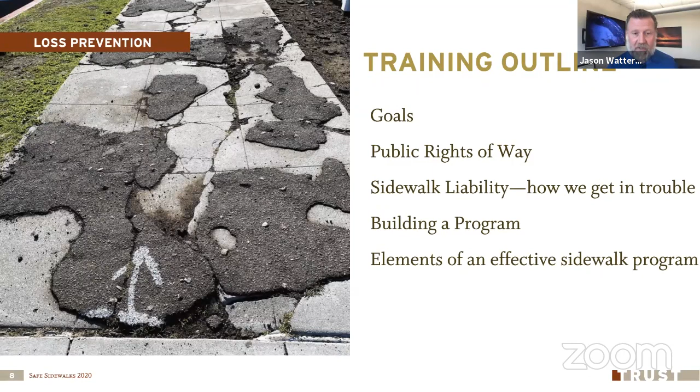Today's presentation is on safe sidewalks, and I'll be presenting on that subject. Sidewalks are one of those necessary evils. They're a great thing in our communities, but they can cause us a lot of problems. So today, this is the outline of what we're going to talk about. We'll talk about what's really our goal as it pertains to sidewalks. Talk about public right-of-ways, the liability that we face, how we get ourselves into trouble sometimes, and how to build a program that can be effective in managing this major part of our public infrastructure and be able to avoid those big losses and have people get injured in our communities. So that's what we'll talk about.

First of all, what's our goal? What are the things that we're trying to accomplish when it comes to sidewalks? Well, one, we want safe pedestrian movement through our communities. Okay, that seems like a pretty reasonable thing, and that's probably why many of your communities have decided to put sidewalks in place, or if you just have a building, you put those sidewalks around there so people aren't stepping in mud puddles or trying to find a way into your building. We're providing them a safe path of travel.

Another of our major goals is to prevent accidents. We don't want people to get hurt, and we really don't want to get sued. We really don't want to have to pay out for injuries or other damages that happen because of our infrastructure. And so those are really our goals. We want to have safe travel through our communities and not have people get hurt. And we really don't want to pay out money because people got hurt.

So one of the concepts that we start out talking about are public rights of way. A public right of way is really an easement to allow travel for the general public. In most cases, the property that sidewalk sits on is probably owned by the homeowner or the person owning that property there. But we as an organization have secured an easement to travel along there, and we put the sidewalk there. So basically they're owning the property, but we have this route of travel that's going over that. The right of way is generally thought of as being from sidewalk to sidewalk in improved communities. Maybe a little bit different out in the county unincorporated areas, but when we think of a traditional city, sidewalk to sidewalk.

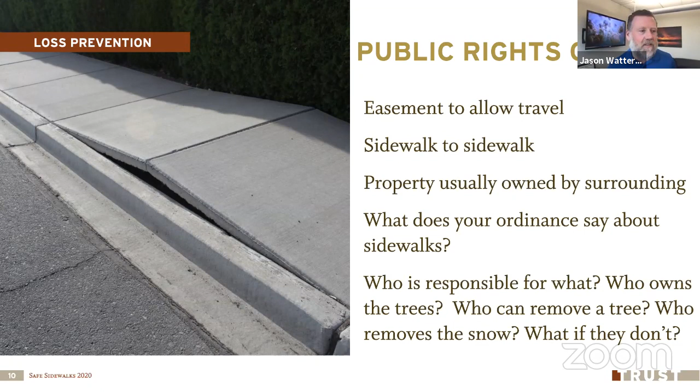Okay, so let's talk about sidewalk liability. First, there's kind of this concept of, if I don't install sidewalks, I don't have any sidewalk liability. And that's kind of true.

It's kind of correct. If I don't have sidewalks, it's pretty difficult for somebody to sue my organization based on tripping and falling, because the public improvement was never put there. But in many cases, we've decided that this is one of the amenities or one of the public improvements that is really valuable to our community. We want to have safe sidewalks so people can travel from house to house and throughout our community, and trails go along with this as well.

We've made the decision that we're going to put this public infrastructure in. As soon as I pour a slab of concrete, I own some liability for that. So if I have a sidewalk, I own it, and I own the liability that may go along with there. And I know there's some ins and outs of whether you're responsible for these things, and that's what we'll talk about next. But we really need to get used to that concept that, hey, if I build a building, if I lay down a sidewalk, I own some measure of liability as it pertains to that public improvement.

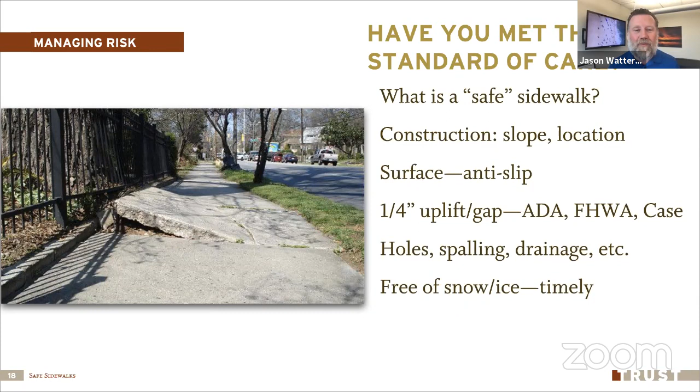Couple of cases, and once again, I'll just let everybody know, and you probably figured this out a long time ago, that I am not an attorney, and so when I talk about case law, I'm not giving legal advice here, but there were two cases here, and there are others, but two really important cases.

One was in 1973. It was West versus Provo City, and it basically said the city's not liable for snow and ice unless they did something that was negligent, like we left it too long, or we designed it in a certain way. But just because it snows, just because there's ice there, the city was not necessarily liable for just the presence of a slippery surface. Okay, so that was a good one for most of us in local governments.

And then in 2013, we had Kerr versus the city of Salt Lake. This was really kind of an earth-shattering case because it kind of undid a lot of things that we'd had in the past. What happened was there was a section of sidewalk in front of a business that had some uplift. I believe it was a new business had gone in there. They contacted the city. It was damaged surface.

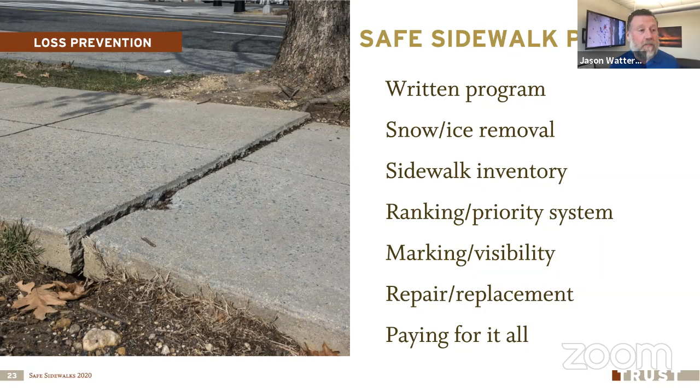So here are some elements of a safe sidewalk program. One, have a written program, a snow and ice removal program, how we handle that, an inventory of our sidewalks, ranking the problems and the condition of our walking surfaces, making hazards visible, and the procedure of repair and replacement, and who pays for it all. These are all important parts of that. So once again, have a written program, write it down. You don't need to reinvent the wheel on this. There are tons of great programs out there.

Juan is on here. I was going to pat him on the back a little bit for Springville City, but he's not there anymore. Springville has a great program, and it's available online, so you can look it up. And it really outlines that. And I'm not just picking out Springville. There are tons of you out there that have good programs. Go in, call the other cities and say, how are you doing this?

And put your program together. Share those things. Let's get better together. This program needs to pair with your local ordinance. Who owns the trees? Who's responsible for repair and maintenance of the sidewalk? We need to follow that. It should also be part of our accessibility plan as we look at planning for those with disabilities. When we talk ADA corners and accessibility, those types of plans, all of this should dovetail together, so we have a comprehensive plan.

What are appropriate modes of travel? I just threw this one in because this is a current challenge that some of the larger cities are seeing, and it may extend to the smaller cities where we have these rental scooters. What are appropriate modes of travel? I probably won't go out on a limb on this one, but it does concern me when we have people going at a fairly high rate of speed on these scooters, intermixed with pedestrian traffic. It also makes me concerned: what if we put those scooters out in the traffic lane? That's a concern to me as well. But it's something I think we all have to look at and face what the realities are as modes of travel change.

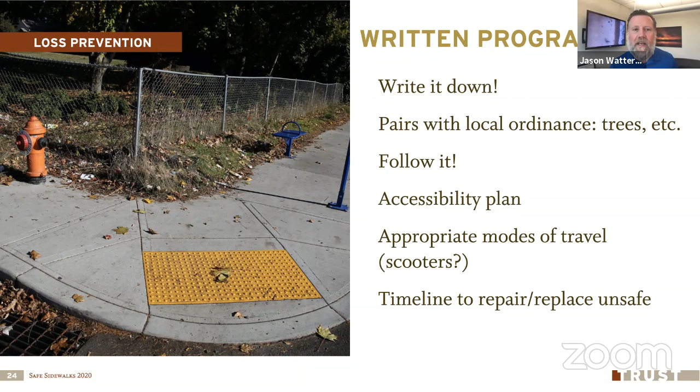All right, snow and ice removal. Who's responsible for removing snow and ice? What if they don't do it? What does our ordinance say? Can we charge this person, or can we fine the person? I'd prefer not to do fines. I'd prefer just, hey, if it's not done, we're going to go out and clean it up, and we're going to send them a bill for it if that's what your ordinance says. But we've got to look at that ordinance and ensure that we've covered all of our bases.

What about those that are unable to do that? So we find these hardship cases. Here we have an elderly person on a fixed income, and they don't have the physical ability to do this or the money to do that. Do we have an option in there to handle those situations? Because I know it stinks to have to go out and clear walks, but it may be something that we'll have to do to ensure safe travel through our communities.

What about the sidewalks around our buildings? Doug talked about this in his presentation, but let's have a snow removal log. Let's document the things that we do to make it safe. In the absence of that, it's our word against the person that maybe fell down or their attorney, and that can cause us some problems. But if I've got that document that says every time it snowed, we went out and cleared the snow and put down ice melt, that shows that we're being reasonable and prudent.

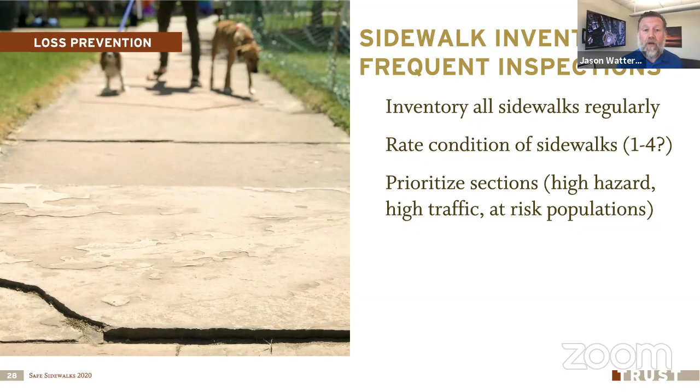If I've got a sidewalk right along, I'm looking out on US 89 here. If I've got a really bad spot in the sidewalk, I don't want people jumping off of the sidewalk to go around it and stepping on the major highway. At-risk populations. If I have a school, if I have a nursing home, if I have an area that has a population of people that are at higher risk, those are areas that we want to prioritize more than just the average sidewalk that's out there and doesn't get a lot of travel.

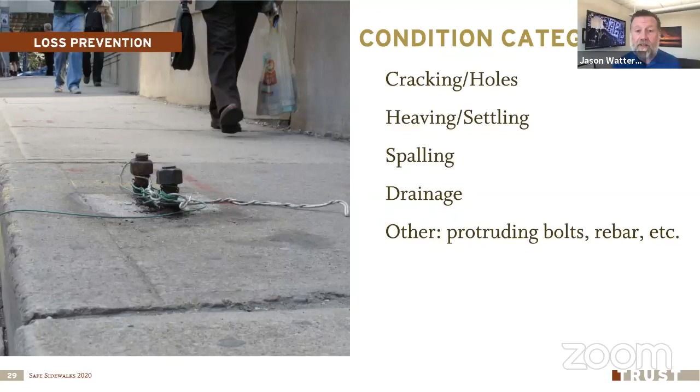All right, so different categories of conditions: cracking or holes in the surface, heaving or settling. This is probably the most common one that we see, is at those joints we get uplifts or sinking. Spalling, just where the surface of the concrete has flaked off. Maybe the aggregate is showing there. Drainage problems, where I'll end up with puddles, and those puddles could freeze and become really slippery. Other things are hazards, protruding bolts or rebar or things like that could be a hazard to pedestrians as well.

So priority, if we're looking at heaving or settling, this is probably the most important one or the most common one. From a 1/4 inch to a 1/2 inch is low priority. But as we go up in that height or the type of uplift, maybe it's broken, maybe it's at a weird angle, one side is up, the other isn't. Any of those things can increase the hazard.

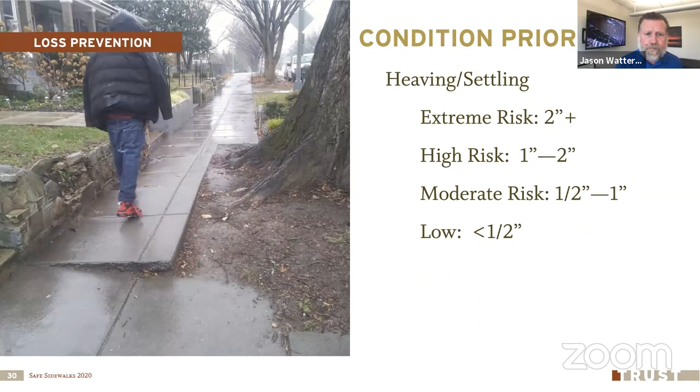Spalling. So when we talk about the top surface, sometimes you work the concrete a little bit too much. Sometimes you get salt or other things that attack the concrete, and the top layer comes off. This is called spalling. So we look at the amount of spalling. So I take a given panel, and some numbers that are thrown out there: up to about 25% we call moderate risk, but beyond that, if we go above 50%, then that's a lot higher risk. If I start having the aggregate come out, and so there are holes that are 1/2 or 3/4 of an inch, that becomes extreme risk.

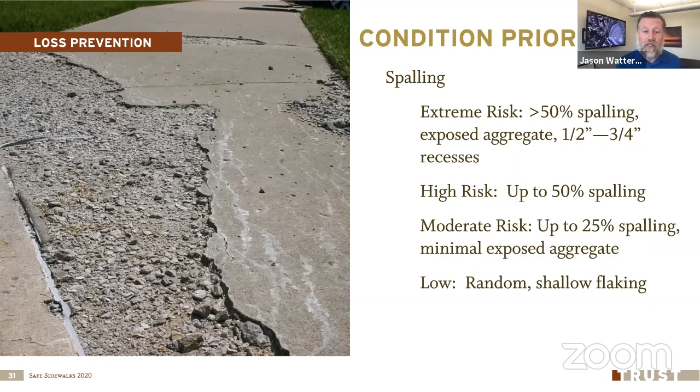Okay. Drainage. What are the puddles? If I have a small puddle that doesn't maybe cover the full width of the sidewalk, that might be a lot less of a risk than something that puddles and goes all the way to the road surface, and something that may cause ice buildup and slip hazards.

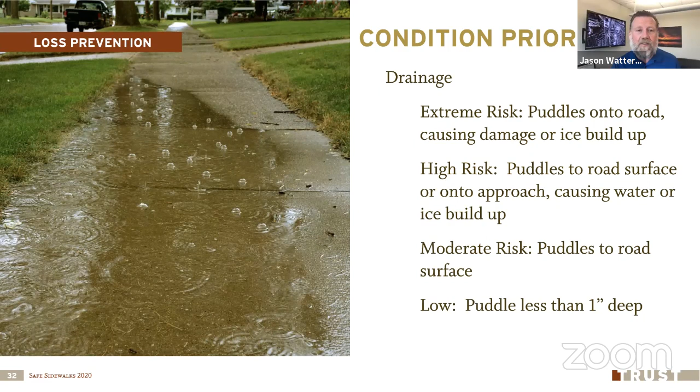All right, so here's kind of the principle that we look at on this. We want to address the extreme and high priority cases now. This is something that we need to dive into and spend some money on. We need to put a reasonable amount of money towards dealing with these problems.

That's what we're going to be judged against. Have we been reasonable and prudent? So put our money towards those high priority and extreme risk areas now. And then we need to schedule and budget for those moderate and low priorities. We realize that you can't go out and replace every panel of sidewalk in your city this year. It takes time to do that, but we have to be reasonable about that.

If I'm going to put $1,000, or depending on the size of your city, $100 towards sidewalk repair and replacement, they're going to laugh you out of court on that. It needs to be a reasonable amount, and that's really based on what is the size and extent of the public infrastructure in your city.

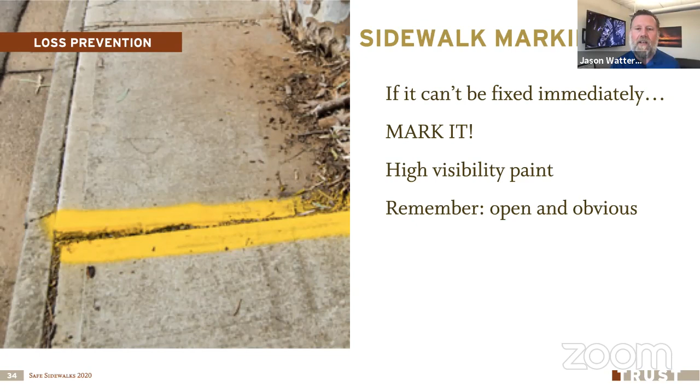If I can't fix it right now, what can I do to prevent or to reduce the risk that I'll have a problem there? Well, we want to mark that. Let's go out and paint these uplifts, paint these problems with high visibility paint, so people will see that there's an issue there. Hopefully we won't have a fall there, but at least we've made that open and obvious. When we talk about hazards, we want those to be open and obvious and not hidden, and that can help our argument.

All right. So repair and replacement. So we have to ask ourselves, can it be repaired? Sometimes it's to a point where there's really no option but to replace the entire panel. So we want a standard on that. What must be replaced? We look at that spalling. Well, if I get 50% of that, unless I can resurface that, depending on the situation, I'll probably be replacing it. If uplifts are to a certain point, you talk to the grinding companies, and they'll have a certain point. If it's beyond 2 inches of uplift, which I think is the standard for most of the grinding companies, they say we can't grind it at that point.

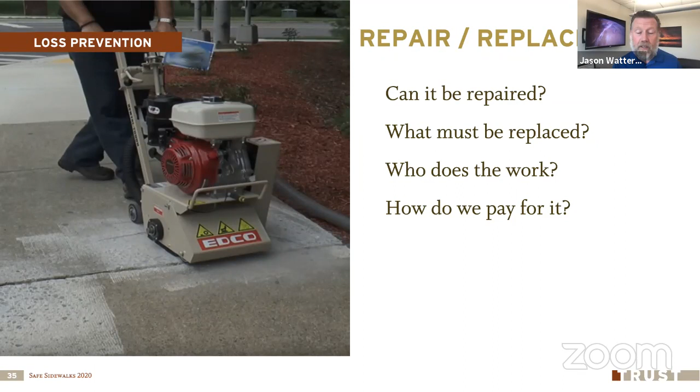So who does the work? How do we pay for it? In many cities, the homeowner is required to do this, and so how do we go about getting them to do that and getting them to pay for that? Some cities have built a program where it's a cost sharing. And as I looked around, there are a lot of cities right now that said, "Hey, our budget is really tight because of changes due to COVID-19. Changes in our tax income, so we're just shutting this off right now." There's no budget money for that cost sharing, and I understand that, but those are things that we should think about. How are we going to pay for that?

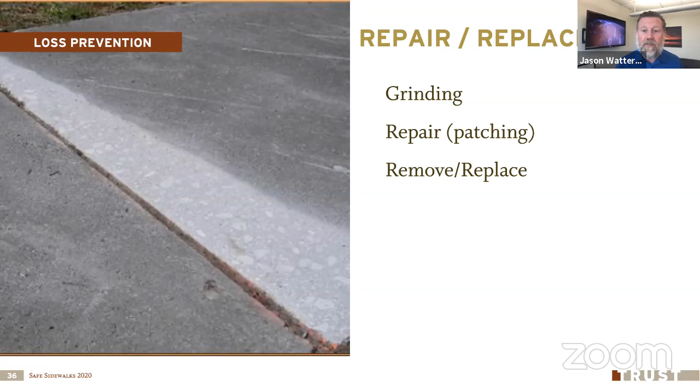Grinding is a good option for those smaller uplifts. It gives us a way to buy some time as we have some of those less serious hazards out there. We can hire a company or buy a grinder ourselves and go out and ease those edges. Repair or patching, sometimes that's a possibility as well, and then down to the removal and replacement.

Just a couple of things to think about here. Trees cause problems, and so as you go about building your ordinance, think about whether you want to regulate the types of trees that are out there. This is something that also impacts our sewer losses as well. If we're planting willows and cottonwoods in these areas, we'll probably have problems not only with our sidewalks, but with our sewers as well. So plan on those, and residents cause problems. So think as we build our ordinance, and come up with some good guidance that will help people not have problems with these.

Like I said, how do we pay for it all? The standard that we're looking at is we want to be reasonable and prudent. So we need to have a reasonable timeline so we can defend ourselves in the event that somebody does happen to trip on a hazard that we've identified out there.

Let's get those extreme or high risk situations taken care of as soon as possible. I realize it can't be done by next week, but some of it can. Some of it's bad enough that we may need to barricade that section and keep people away from it because it's an imminent danger situation.

Sometimes we have the ability to share costs with property owners, like I said, something out of your ordinance. UDOT also has what they call a safe sidewalk program, where they will do a 25% contribution if the sidewalk that needs to be repaired is next to a state highway. It's a UDOT program, so there are quite a few caveats that go along with it, but that can help us with that as well.